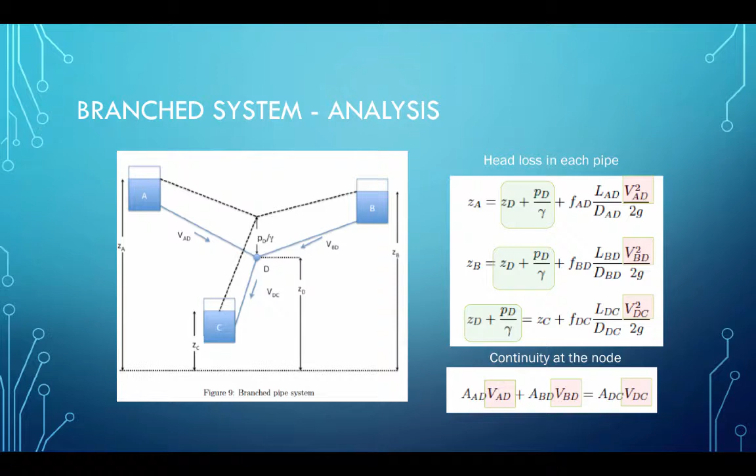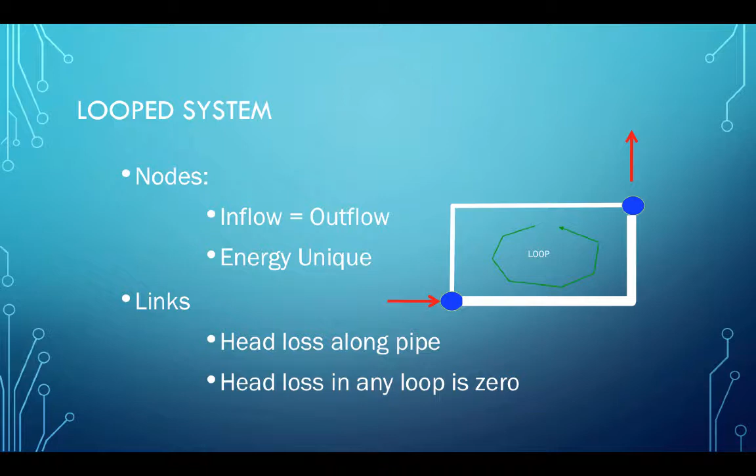Hello, let's continue with our examples of Lesson 6, Hydraulics of Networks. We pretty much examined this three-reservoir system, and now I want to look at a loop system. And this is where pipes rejoin at a different node. Key things are nodes have continuity and energy, and the links have head loss along the flow line.

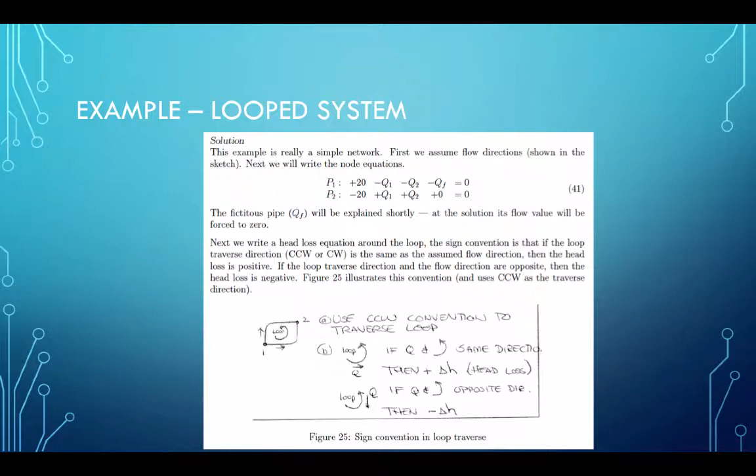Skip through all this because we've done it already, and let's start here. So what I'm going to do is deviate from the PowerPoint slides because the PowerPoint slide uses an older solution technique, and we'll actually use the solution technique we just developed and adapt the spreadsheet we just developed for this next problem. So I want you to take a look at this, and then we're going to draw the problem on paper, formulate the necessary equations, build the Jacobian, and run the solver.

So here's the problem. We have this setup, and it's drawn better obviously in the PowerPoint. This is a 3,000 foot pipeline. That's a 3,000 foot pipeline. This one's 2 foot diameter. This one's 1 foot diameter. I'm going to call this node A and this node B. Node B, there is 20 cubic feet per second demand. And node A, there has to be a matching amount, but we're going to treat node A slightly differently.

We're going to treat node A as if it is a fixed grade node, and I'm going to set the grade at 100 feet. We could set the grade to anything we choose, but I'm going to choose 100 feet. And this we'll call pipeline number 1. This will be pipe number 2, and the flow directions are indicated by the purple arrows.

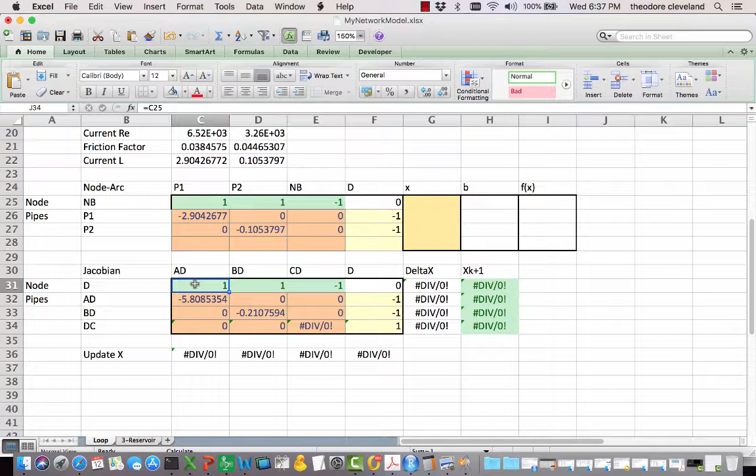So now we have to modify the node arc matrix. So this is going to break a lot of things. We're going to get errors, and we're not going to sweat it. P1, P2, node B, node B, P1, P2. This stuff is all gone. We'll take this out. That's now empty. That's empty. Let's see what we can do to clear this one. I'm going to leave it because it'll be handy to modify it.

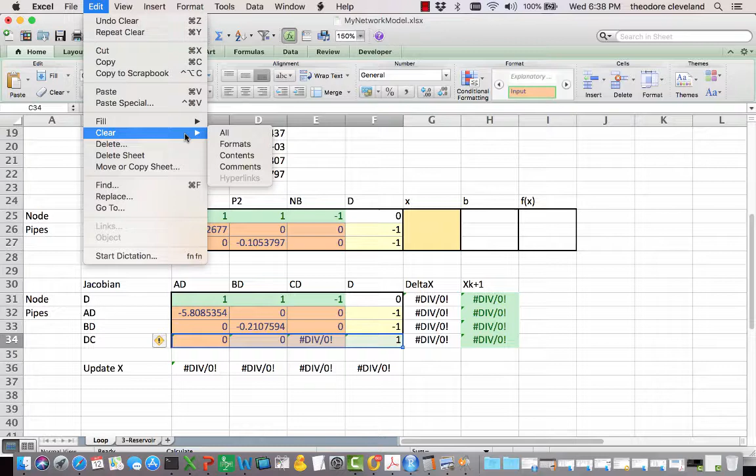All right, let's clear some of the formatting. Okay, I'll fat border all that. I will clear formatting. Clear formatting. Actually, I think I can probably, yeah.

All right, that's about what I have to work with. Everything's resized, and so we will continue from there. Let's see if it'll allow me to do this. I hope so. Cool. Sometimes that doesn't work.

All right, let's make our node arc incidence matrix. So we've just done that. It's 1, 1, 0. This one is going to be minus L1, 0, minus 1. This one's going to be 0, minus L2, minus 1. Our right-hand side is going to be 20 for the demand, minus 100, minus 100.

Our x will equal transpose of our current vector. Our f of x is going to be equal matrix multiply that times that minus that. See if that makes sense. I'll buy that for $1.

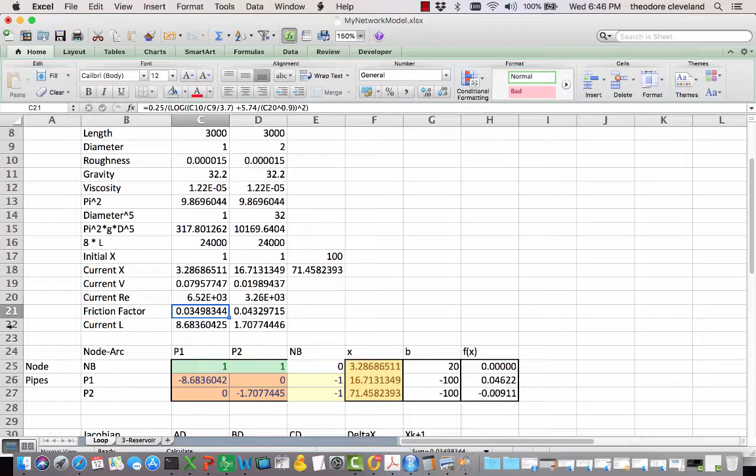I'm going to fix it to the desired value that was in my example, and then all we have to do is move to that. I want to run it on the fixed friction factor. I actually don't think it's going to make a whole lot of difference. There we go. So using the fixed friction factor, it says the flow in pipe 1 is 3 cubic feet a second, and the flow in pipe 2 is, let's call it 17 cubic feet per second.

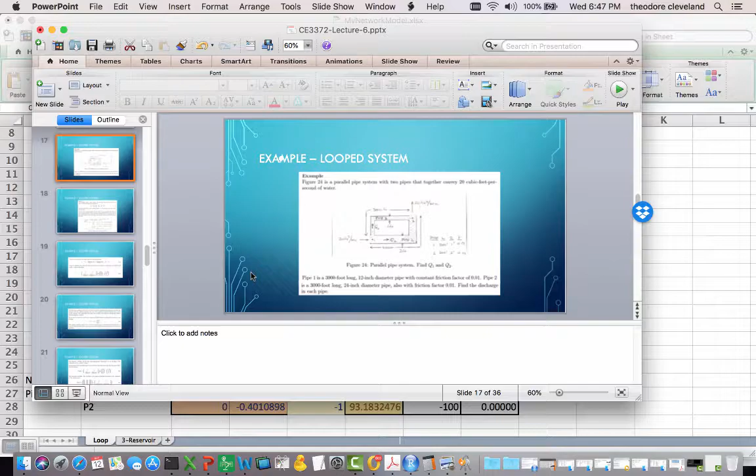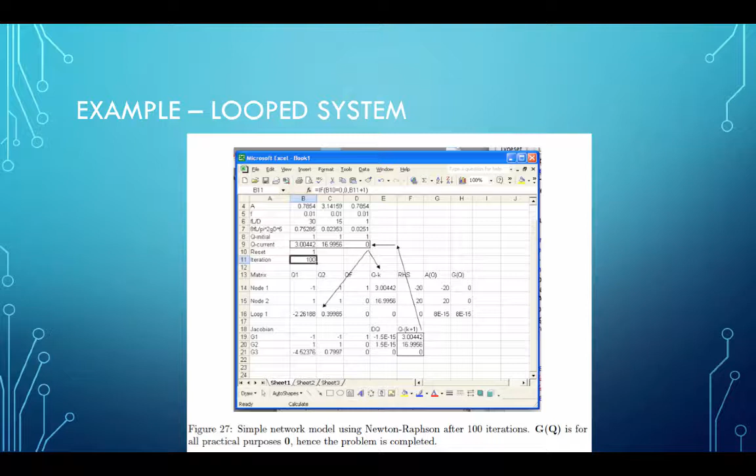If we were to go back and look at the example worked the old way, we would come up with 3 cubic feet a second and 17 cubic feet a second. The old way states that the head loss is 6.79 meters, which doesn't fit the problem statement because the problem is in feet. But we've now seen how to deal with branched and looped systems.

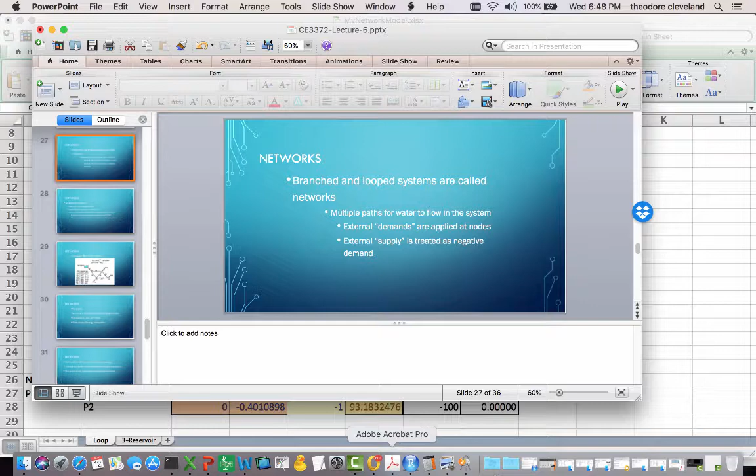Let me go back and switch my thing back to the non-fixed friction factor. Okay, so with the friction factor quite a bit more variable, we have different answers, but they're roughly the same. We're looking at 3 and 17, which is what we had before.

And pretty much the same results. So I'm positive that's working as best we can, and our computed friction factor is just quite a bit higher than was given in the example problem statement.

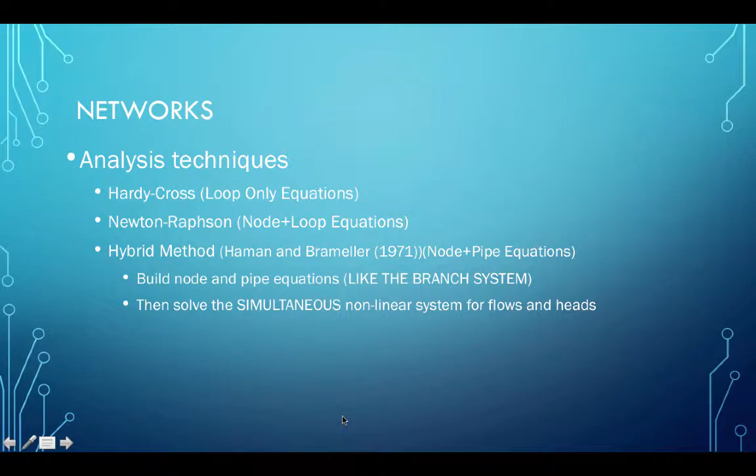All right, we're going to look at one more example. So the analysis technique we just did is this one, the hybrid method. Let's consider this system, and we're going to take the same spreadsheet and modify it again. And the only difference now is we have quite a few more pipes.

So let me copy that, and then we will... So I'm writing down the particulars, 800, 0.67. These are in feet. P3 is 700, 0.67. P4 is 700, 0.67. P5 is 800, 0.67. And P6 is 600, 0.5. We're given the sand roughness height 1e minus 5. And nu is 1.1 times 10 to the minus 5th feet squared per second.

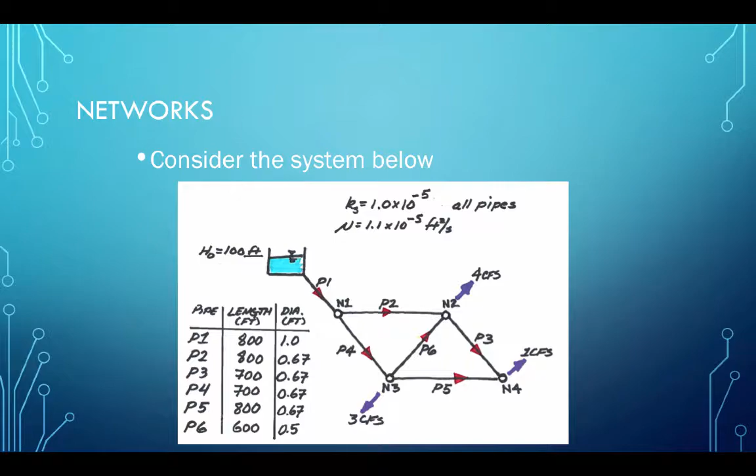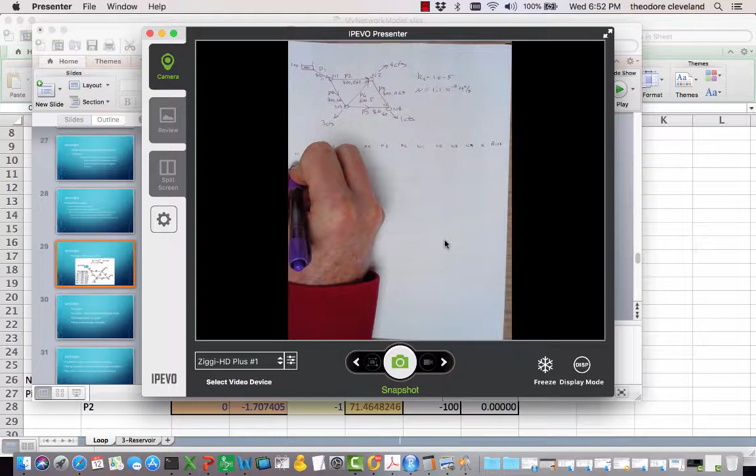So if I move out to my overhead, I've just duplicated that thing, and now we were going to want to write our pipe and node equations. So we have pipe 1, pipe 2, pipe 3, pipe 4, pipe 5, pipe 6, and our unknown nodes are N1, N2, N3, N4. We'll have our X and we'll have our right hand side. So we're using the same thing as before, and then we'll have the node 1, node 2, node 3, node 4 equations, and then the P1, P2, P3, P4, P5, P6 head loss equations, and we're going to use that to construct a node arc incidence matrix. Now I'm going to cheat a little bit because I've done it already, and I may end up copying the node arc incidence matrix from the PowerPoint.

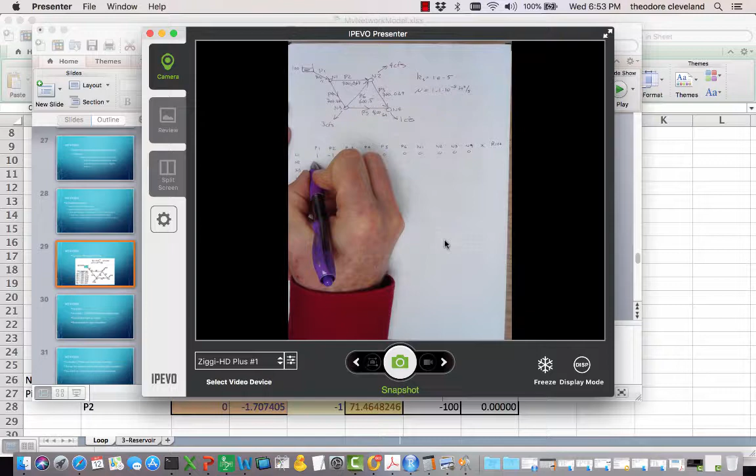Okay, so node number 1. Pipe 1 comes in, pipe 2 leaves, pipe 4 leaves, everything else is 0. Node number 2. Pipe 2 comes in, pipe 3 leaves, pipe 6 comes in, everything else is 0. Node number 3. Pipe 4 comes in, pipe 6 is leaving, pipe 5 is leaving, everything else is 0. And lastly, node number 4, 3 in, 5 in, everything else is 0.

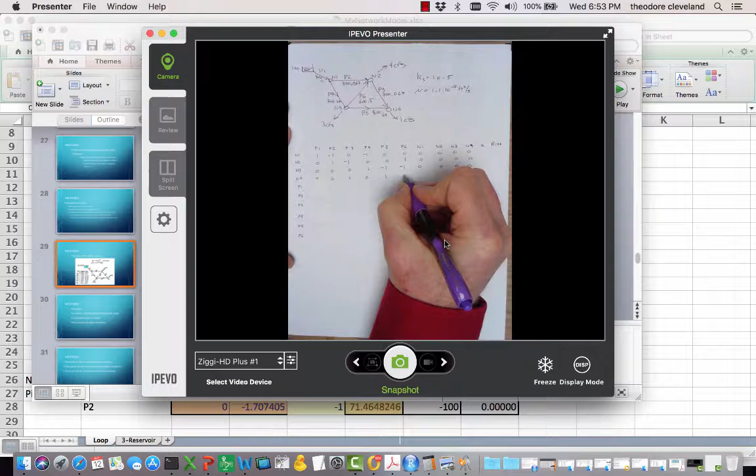While we're here, let's get the demands. The demand at node 1 is 0. The demand at node 2 is 4. The demand at node 3 is 3. And the demand at node 4 is 1. Draw this line here. It's going to make it easier for me to keep track of what I'm doing. Okay, so now we have the pipe loss equations. And let's just look at pipe number 1. So pipe number 1, it has 100 minus loss 1 Q1 equals the head at node 1. Unknown, known, let's rearrange them. So I have minus L1 Q1 minus H1 equals minus 100.

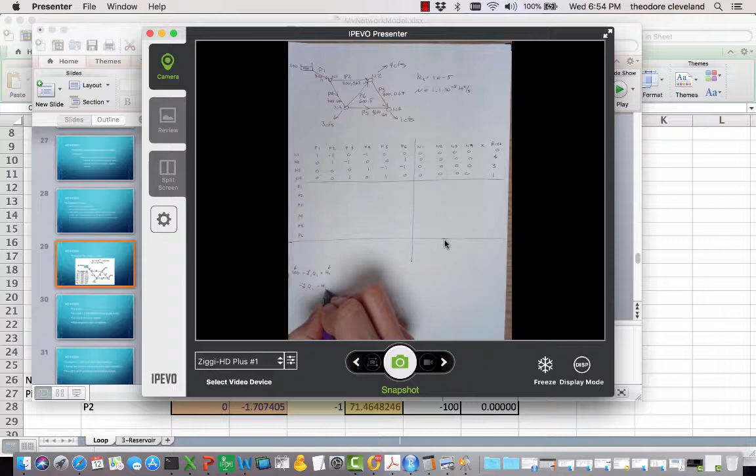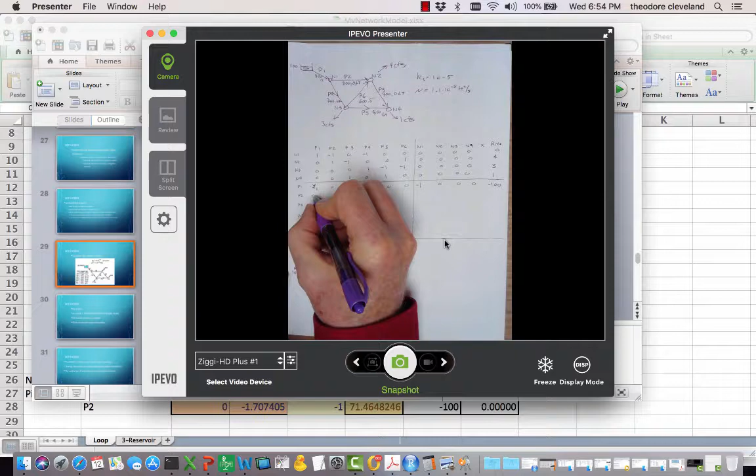I've now picked up the pattern. So this is minus L1, minus 1, minus 100. Everything else is 0. Pipe number 2, I have minus L2. Pipe number 2 connects node 1 and node 2. So it would be head 1 minus L2 Q2 equals head 2. So it becomes head 1 minus L2 Q2 minus head 2 equals 0. So we have a plus head 1, a minus head 2, 0. Pipe 3, minus L3, 0, 0, 0. Pipe 3 connects node 2 and node 4. So it goes from node 2 to node 4, 0.

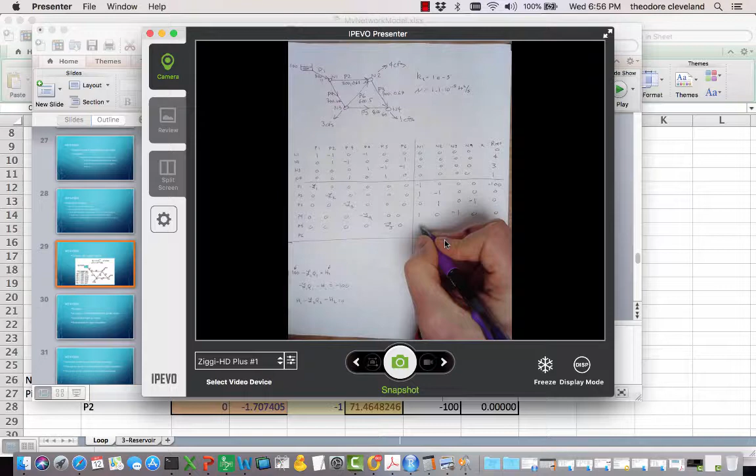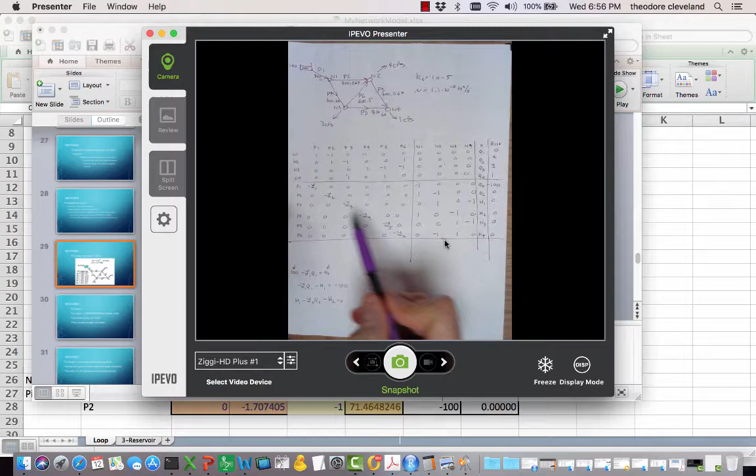Pipe 4. Pipe 4 connects node 1 and node 3. Pipe 5 connects node 3 and node 4. And lastly, pipe 6 connects node 3 and 2. So node 3, node 2. And my right hand side is going to be flow 1, flow 2, flow 3, flow 4, flow 5, flow 6. There's my system. Now we know the Jacobian of this part is that part, Jacobian of 0 is 0, and the Jacobian of this is 2 times whatever it is. So now we have all the information we need to build our next model.

This one's going to be a little bit more elaborate, so let's go ahead and edit, move or copy sheet, create a copy, choose the okie dokie, and we're going to call this, I don't know, the bridge system. Okay, so we have quite a bit of work to do because we have pipe 1, pipe 2, pipe 3, pipe 4, pipe 5, pipe 6, node 1, node 2, node 3, node 4. We'll go ahead and populate the pipe information, and then we will do the requisite linear algebra later. It's going to be quite a bit bigger, but it's the same methodology. Okay, hopefully that'll keep it from protesting.

So, pipe 1 is 800 feet long and 1 foot in diameter. Roughness, we're told, is 1e minus 5. Viscosity, we're told, is 1.1. And that's about all we have for now. Pipe number 2, 800, 0.67, 1e minus 5, 1.1e minus 5. These we can drag over because they're going to be constants. All that stuff is going to be constants. Let's get pipe 3. Pipe 3 is a 700, 0.67. Doing everything in feet.

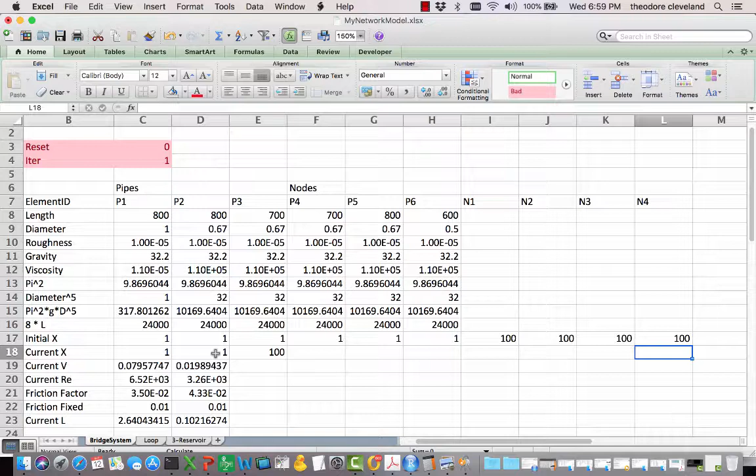Pipe number 4, 700, 0.67. Pipe number 5, 800, 0.67. And pipe number 6 is 600, 0.5. Okay, we can make our initial flows 1, and we'll make our initial heads 100 everywhere. Let's see if I can get this part to work. All right, cool. Looks like that's all built.

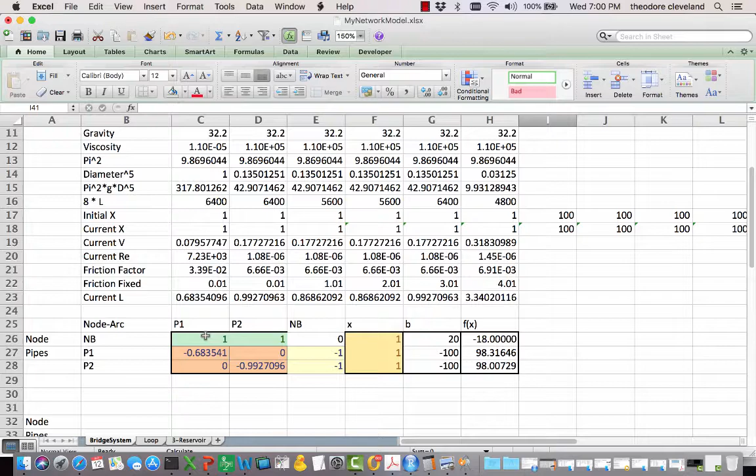Now we have the added fun of pretty much having to completely break this. Let's leave as much around so we have everything available to us. Copy that. Paste, that'll remind us how to build the node arc. And N1, N2, N3, N4, this will remind us of the equations. Let me just copy that, edit, paste special, transpose it, picks up the pattern, cool.

Okay, so that's all going to be green. This is all going to be what we're using, light yellow. These are all going to be old yellow, and that one stays blank. Let's clear out all these formats. All right, now we start entering the node-arc incidence matrix directly from our worksheet.

1, minus 1, 0, minus 1, okay, 0, minus 1, 0, 0, 0, 0, 0, 0. We're going to have x, which we don't know what it is, and we're going to have b. I don't want the green because it's not pretty.

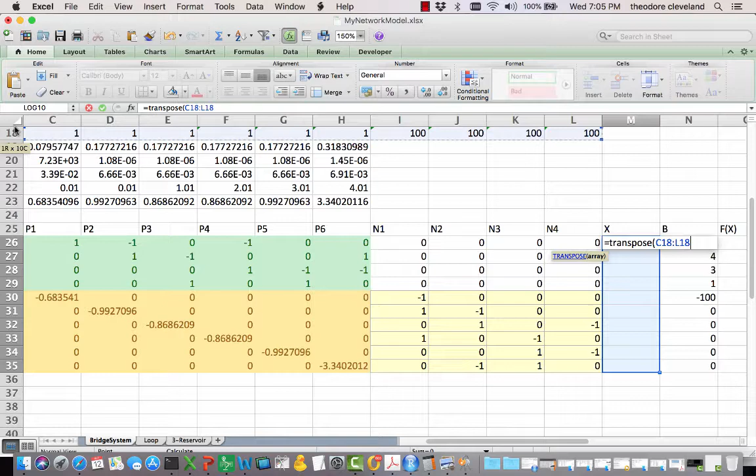Those are zeros. I do not want that to be doing that stuff. Okay, so we'll finish the right-hand side. And these are going to be 0, 4, 3, 1, 0, 4, 3, 1. There's the f of x function, goes right there. All right, this equals transpose of our current guess function, and this equals matrix multiply of that into the x function, and we subtract off b.

Next, we need the Jacobian. So I think the easiest way to get the Jacobian is I'm going to copy that. Actually, I'm going to copy that. Do a paste and clobber. Jacobian, and I know that that equals that. This one equals 2 times above. And this one equals above. Jacobian's built.

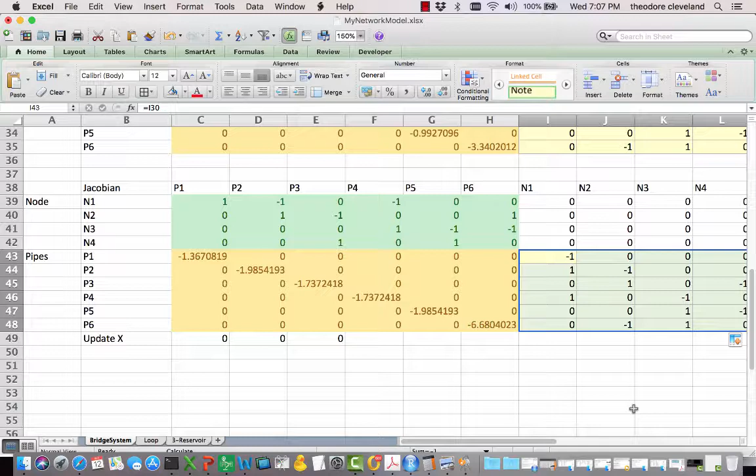Now we need the dx vector and then the x k plus 1. Okay, so the dx vector, if you recall, is matrix multiplication minus 1 times matrix inverse of that guy multiplied by that guy, and then this is equal to that plus that.

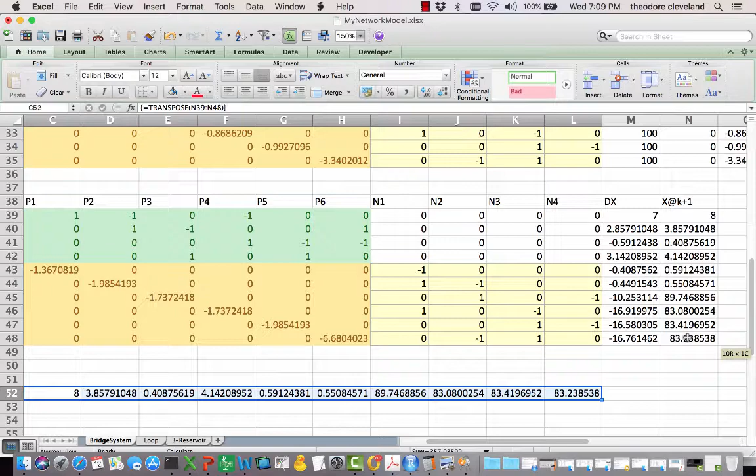And finally, to get the update, I find it easy to pull this guy down here. Do the transpose of the update. And what row is that? 52. So my update. Oh, cool. Did it really pick up 52? We lucked out on that. It must have captured the pattern when I moved everything. I believe we are ready to attempt to solve this problem.

Here goes nothing. So we turn our iterator on, and we'll go over here, and we want to see f of x get driven to 0. There's something wrong right there. Because that value is not changing, so we have a sign error somewhere. But that was pretty quick. I'll go ahead and pause. I'm going to find the sign error.

And okay, the error I found is I had not copied that all the way across. So let's reset it. Start it again. And we should watch this thing very quickly get to an answer. 0 to 8 places. Let's call that good.